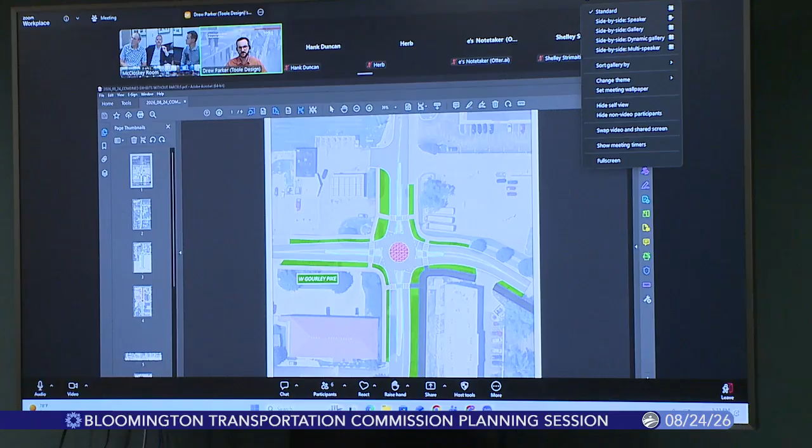Well, thanks for the introduction, Hank. So since we last met, we gave you a summary of what we heard during workshop week and some preliminary concepts, and we have been working on revising those concepts, like Hank mentioned.

By no means are these final concepts, but as part of this study, what we're trying to do is take the design objectives and the goal of the project, all the existing conditions that we collected, and address some of those known issues through these concepts.

So we've picked 10 locations throughout the corridor to develop these concepts, so it doesn't cover the entirety of the corridor. But as a reminder, what we talked about at the last commission meeting, our overall concept, wherever possible, is to narrow the street cross-section in order to widen sidewalks, add larger buffer spaces where we can add more landscaping and separation.

And where possible add shared use paths, especially north of the B-line crossing. So you'll see that shown throughout some of these different concepts here, starting with the first one. So this concept shows Gourley Pike, and what we're showing here is a compact roundabout.

We think this is a really good place to have a compact roundabout because it slows people coming off the bypass and heading towards the bypass. We know that in this northern section, the speeds get a little bit higher. Anything we can do to calm traffic as it comes on and off the bypass helps with increased yield and compliance at crosswalks, and just improves safety outcomes at intersections, because everybody has to travel through the intersection at slower speeds, 15 to 20 miles an hour instead of, today, where they don't have to stop at all at this intersection, maybe more like 40 miles an hour or higher in some cases.

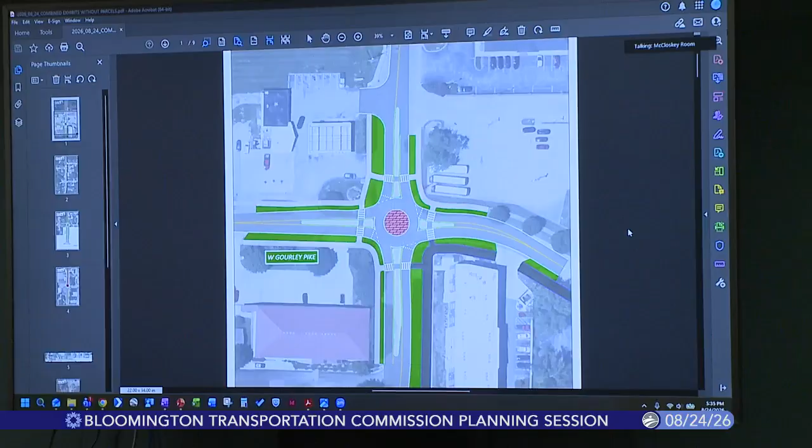I've heard that in recent times, INDOT has been out to review the 17th and the bypass intersection and found it to be problematic. And they have also plans in the near future, next few years, to do something with that bridge. Have those conversations been factored into what we might be doing here, because that's very close to the bypass?

Yes. So regarding the bridge, we currently have a bridge about a half mile west of here that connects Gourley Pike to the Arlington Heights Elementary School area. INDOT owns and maintains that bridge, and they are doing some maintenance, tearing it down and building a new bridge near there. Originally, our hope as the city was to push it closer to Kinser Pike to allow more direct travel for those going to either the high school or to Kroger in that strip mall area. INDOT pushed back on that, so the location of the bridge is shifting a handful of feet, but it's not going to be anything meaningful to really make a difference in this study.

For that reason, this is a bit beyond the scope of this specific concept, but this past spring, the city applied for the federal Safe Streets for All grant program, and some of the areas we applied for are along this corridor. One of the items we applied for, which we'll hear back about later this year, probably December, is an intersection redesign at Kinser and Gourley, and a shared use path to go east on Gourley down to Old 37, cut under the bypass, and come back up north of the bypass. So there is a grade separated crossing at the bypass. Again, that is very dependent on federal funding, but that's an idea we've had because we know INDOT is not budging on that bridge location very much.

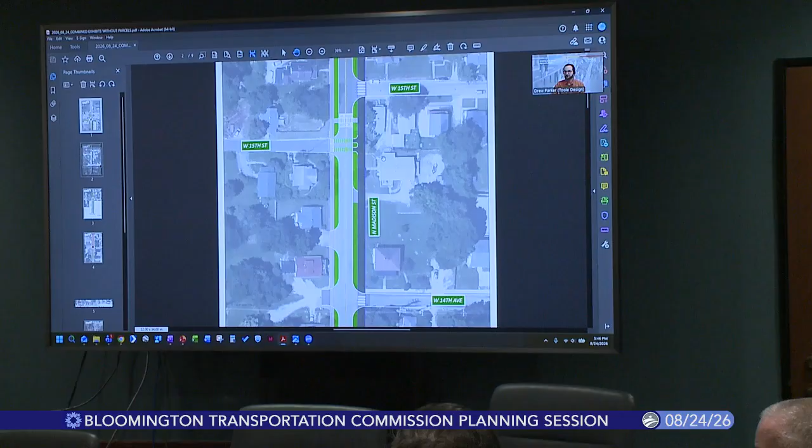Other questions? There are other neighborhood greenways in the city, right? Yeah, that you could reference as examples potentially, like Allen, or I don't know if you have others off the top of your head.

Anybody else? I'm wondering about bicyclists heading westbound on 15th Street, on the multi-use path. They're crossing, I'm having trouble imagining it. If I'm biking on the east side of West 15th Street and I get to Madison Street, if I don't know the thing is there, I might try to turn onto Madison. If I know it's there, I turn onto the side path and jog down. There's a raised crosswalk to my right, but how slow will traffic be slowed down so that I feel safe crossing?

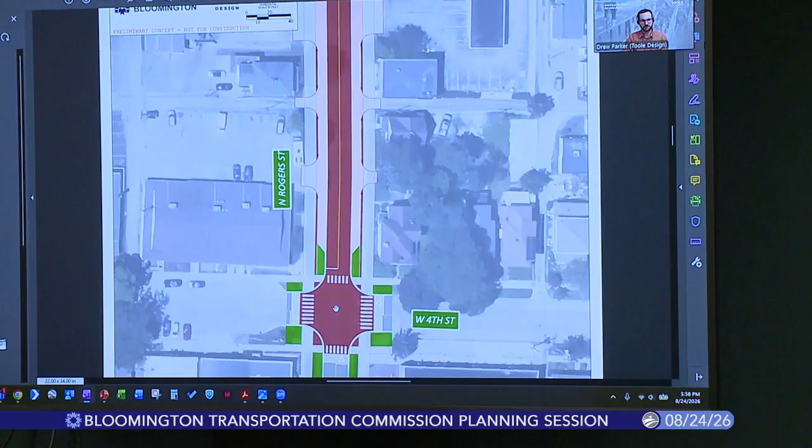This could potentially go up to Kirkwood, or even further up to 6th Street, but we were just showing this section as a representative intersection. The street could potentially be done in pavers or bricks to really create a traffic calming feel and a sense of place, but it could also be done in colored concrete or other materials. The idea is that it feels like a more special place than some other portions of the corridor, with a higher design treatment. That's the concept here.

So that brick red color, that's the roadway. These lighter pink outside sections would be on-street parking lanes. And then you have very wide sidewalks in this stretch to support that more downtown feel.

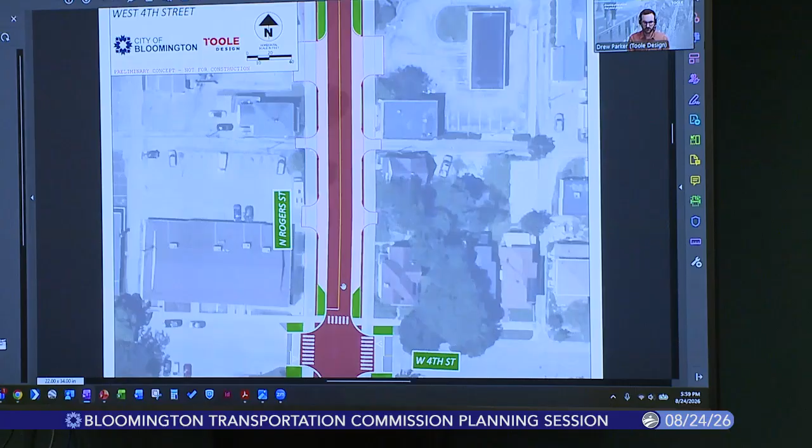Questions on 4th Street, commissioners? Maybe just a clarification. I know we discussed in the past the different treatment, the brick or any other material, but is it just the aesthetics, or is there any function towards that as well with this change?

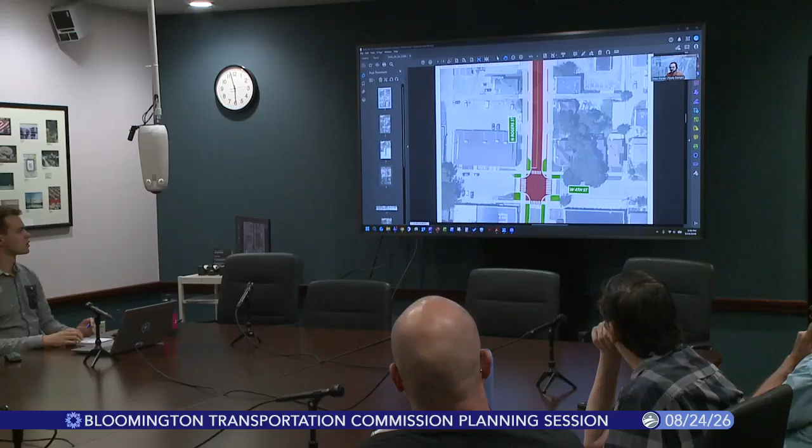Brick and pavers also have a traffic calming effect for people driving. There's both a visual and auditory change compared to asphalt or concrete. You'll see this in a lot of communities on downtown streets, maybe just on the public square or a few blocks around the most downtown area. They'll do it in brick or pavers because it really slows down traffic, especially when there's a lot of activity in that space. So it's not just visual, it also has a bit of a traffic calming effect.

Got a question, Mr. Cobb? So instead of brick pavers, does stamped concrete give you the same perspective? Brick's pretty expensive. Potentially. I'm not the right person to ask about that. I'm not an engineer, but I would speculate that stamped concrete maybe doesn't have the same strength for driving on as pavers and brick. But I would need to ask one of our engineers about that in more detail.

I'm gonna ask a question here of staff, I guess. Is cost one of our concerns? Do we not have an interest as a commission in spreading out improvements across the city? And if cost is a concern and there's no engineer here to answer our questions, are we supposed to make a final weigh-in tonight?

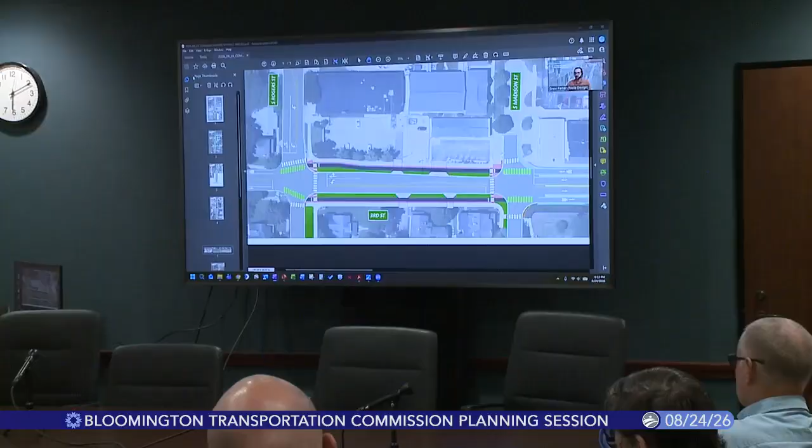Comments or questions, Mr. Binder? One concern or perhaps objection I have to this, which overall looks great by the way - one thing that bothers me a little is that the separated bike lanes on the section of 3rd Street between Rogers and Madison go under the B line, where the roadway currently is, if I understand correctly. They don't connect with the B line. Is that right?

So what we've shown in this southeast corner of the Madison Street intersection is extending this shared use path that does connect up to the B line. That's one place where there's a connection. But you're right, because this is an underpass going down under the B line, we're really just repurposing the motor vehicle travel lane, so the connection would be at this sidewalk level, where part of it exists but doesn't go all the way to Madison. This would propose extending that all the way to Madison.

I'd encourage the team to consider ways to make the connectivity between east-west bike lanes on 3rd Street and the B line more straightforward and less awkward, especially if you're coming south on the B line and want to turn west onto 3rd Street. It's a little awkward, and there's not really inherent value in having these cycle lanes go under the B line when, I understand for cost reasons, if you're reducing motor vehicle traffic lanes to one in each direction you have the roadway space to do that, but it doesn't improve connectivity to the B line itself. I understand the explanation about the side path on the south side of 3rd, but I'd hope there's some thought given to better ways to connect to the B line here, because I think that's a real opportunity.

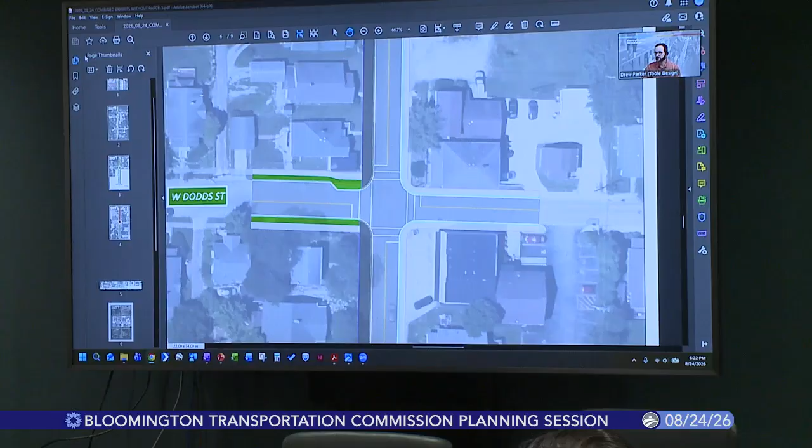So the shared use path is on the west side of Rogers in this area? There is a shared use path from Country Club to Patterson on the west side of Rogers, and this would essentially extend that path further north. Are you going to move the sidewalk, the path, out into the roadway? That sidewalk has retaining walls on there. Yeah, so this holds the back of sidewalk on both sides of the cross section, and it would widen the sidewalk into the street.

Because in some places currently there is an on-street parking lane here, so the pavement is a little bit wider than this currently. As we saw in our parking utilization counts, the amount of people parking in that space is very little or zero on most blocks in all the periods that we checked. So we're repurposing that space to widen the sidewalk. This doesn't change the back of sidewalk in this section.

And that goes all the way to 3rd Street on that side? For this section, no. Our proposal was to extend it up to, I believe, 1st Street, where the existing bike lanes start in the Hopewell area. Oh, and then it's going to cross the street and go through Hopewell? Between 1st and 2nd, you have the new existing protected bike lanes, and then north of 2nd, we were not proposing any shared use path or any additional bicycle infrastructure. North of 2nd Street, there's no infrastructure, bike lanes north of there? Correct.

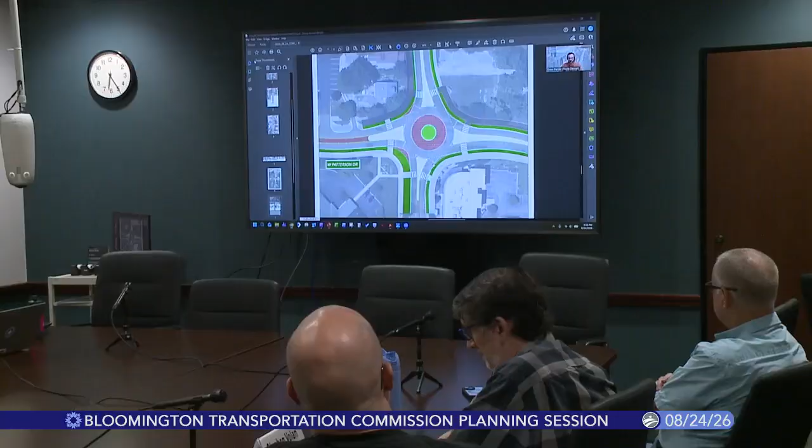So the next concept that we have is at Patterson Drive, and this is a place where we have a little bit more right of way. So we're showing a single lane roundabout in this section as a potential concept. This does potentially require, similar to Gourley Pike, a little bit of easements for shared use paths and sidewalks on the edge of the roadway. But there's a little bit more right of way, and a little bit more traffic volume, side street traffic volume with Patterson. And so the nice thing about a single lane roundabout here is that it calms traffic both east-west for Patterson as well as Rogers, keeping those speeds lower to keep everybody safer at the intersection.

So we also have, coming from the east, a shared use path along Patterson that connects into here as well. That's also why we have the extension of the shared use path on the west side in this section, making that connection east-west to Patterson, but also to the south on Rogers where it continues.

So for the single lane roundabout, you can see here the larger circle showing the red brick crosshatch, that would be mountable for large trucks, but the green center circle could have landscaping in it or a gateway treatment, public art, that kind of thing, because it doesn't need to be traversable or mountable by large vehicles. So this is both a safety and traffic operations improvement, potentially over the existing signalized intersection.

Questions on Patterson? Mr. Binder: I'm curious what your methodology was in determining the size of this roundabout, the diameter of it.

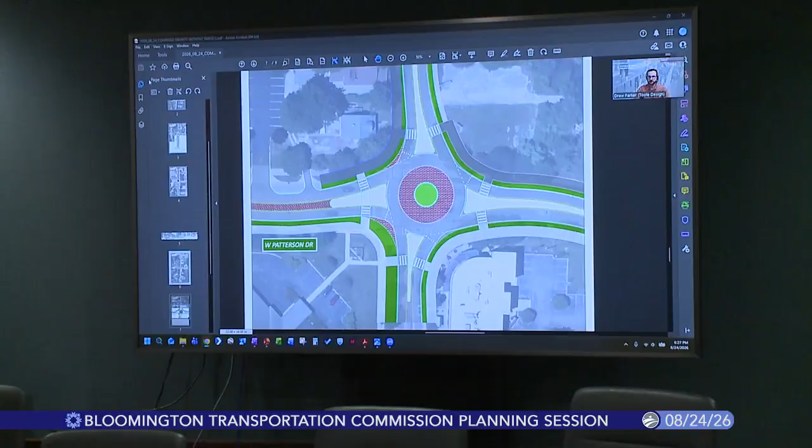So this uses a standard inscribed circle diameter for a single lane roundabout using design best practices. There's some flexibility, and I think we went as small as you possibly can. Whereas at Gourley Pike, that's a compact roundabout, and the reason for that is because there's not as much space, so you need to use a compact roundabout and make the circle smaller, but then the full circle needs to be mountable. So this is essentially as small as you can get with a single lane roundabout. Some of the benefits of a single lane roundabout are a little bit more deflection and slowing of vehicles as they approach, larger median refuge islands, a little bit more capacity than a compact roundabout, and accommodating truck turns without them having to traverse and drive over the center island.

Okay, otherwise they operate similarly. I guess I don't totally understand why there's a hard delineation between what is considered a mini roundabout versus a single lane roundabout. In my mind there's just a continuum of compact roundabouts on the smaller side and single lane roundabouts on the larger side. But you're suggesting there's actually a distinct set of categories for sizes of roundabouts, at least in engineering best practices.

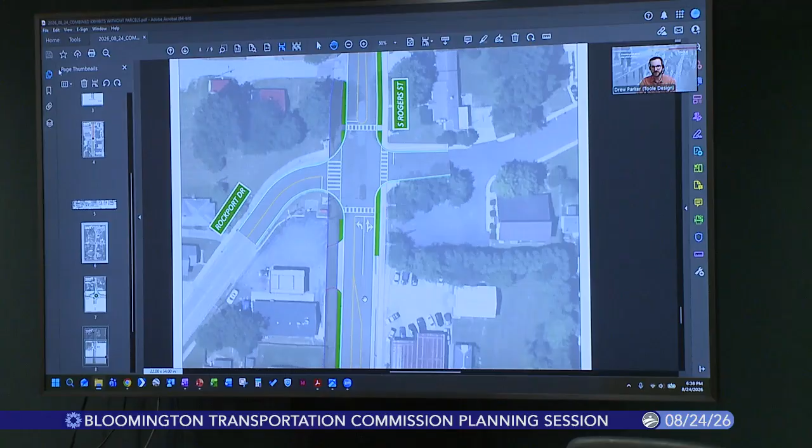So what we're showing here is adding a northbound dedicated left turn lane. Today there is a northbound through lane and actually a dedicated right turn lane into the street to the east, which is really not needed. The traffic volume is very low for that dedicated right turn lane.

So we're adding this dedicated left turn lane, converting that outside lane to a through right turn lane, and that allows us to have a striped median on the north side here and just better organize the intersection and get left turning vehicles out of through traffic so that they don't back up the through traffic and create a safety issue. What we're also showing here is adding another crosswalk on the north leg of the intersection. There's no crosswalk on this north leg today, so this would add in a new crosswalk there.

Other than that, it is very similar to the existing cross-section, but we make a couple of minor tweaks to make things more compact and better organize traffic through the intersection. Questions about Rockport Road?

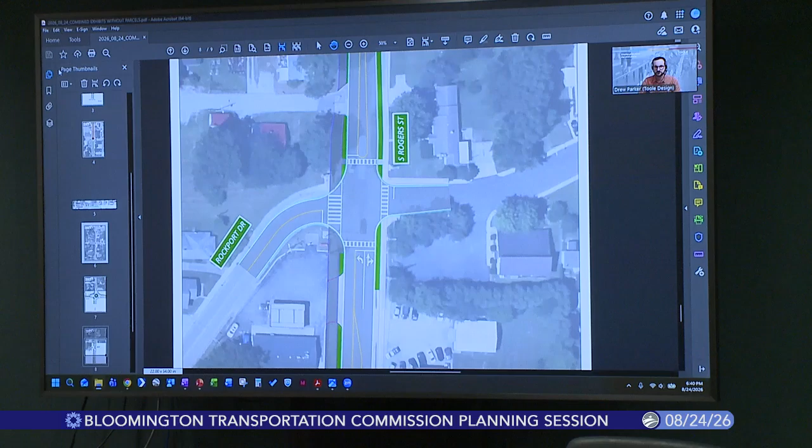I don't love the right turn angle from Rogers to Rockport. I feel like if we're trying to be safety minded here, we should be trying to aim for closer to a kind of 90-degree approach. I think there's definitely some potential here for, at such a shallow angle, a conflict between right turning traffic from Rogers and the multi-use path.

And then the other thing I would say is, it doesn't seem like there's any reason to not have a poured concrete island on Rogers for the crosswalk on the north side of the intersection here versus just a painted one. But yeah, I don't know. This intersection's been a problem for a long time, and I don't live in this area, but I have plenty of friends who do, and I don't think anybody really likes this intersection.

So I hope that if we are gonna try to improve it, we can do as much as possible. Further comments or questions on Rockport? Mr. Midas, I take it you'll speak up when you have a question, right? Yes, I will. Okay, I'm good now.

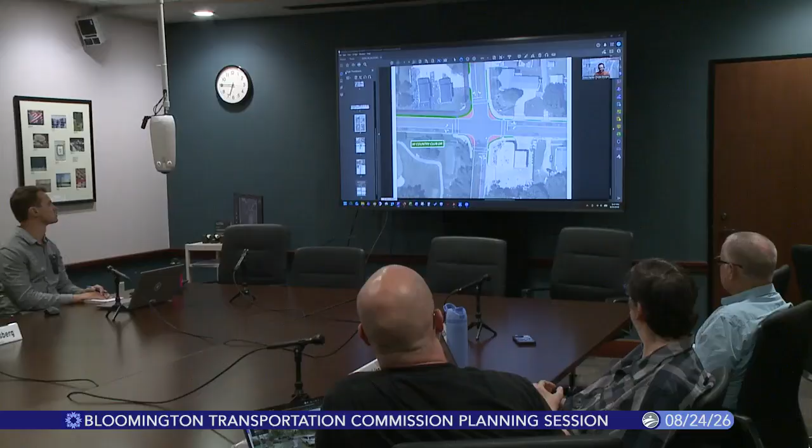Any other questions? Let's move south to the next intersection. The last concept I have to show you today is at Country Club Drive. Like some of the others we talked about, we also tried test fitting a compact roundabout here. But because Country Club, similar to Patterson, is a truck route - we have to design it for large trucks to move through - we need a larger circle for the roundabout, and we weren't able to fit that. We tried and tweaked it, went back and forth a number of times in review, and it just took up too much space and required too much additional right-of-way acquisition to really be feasible.

So the other concept we came up with is to add truck aprons at all the corners and make this intersection a lot more compact. Like Hank mentioned, I think one already exists - I can't remember where you said, in Patterson. So like it already exists in the city, and we could look at that for Rockport. The idea is that trucks can still make these right turns, but passenger vehicles would be slowed down significantly with those truck aprons, because you need to track around them. So that's the overall concept - just make it a more compact and slower intersection, and more comfortable to cross as a person walking or biking.

Questions on Country Club from commissioners?

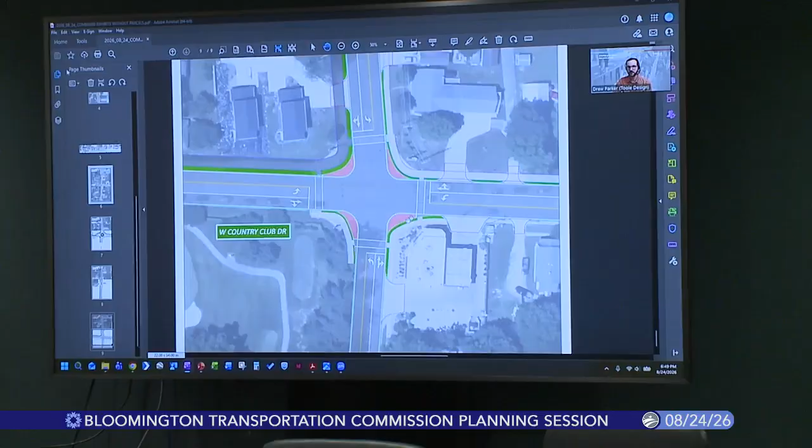We discussed crosswalks just now? There is a downside, yeah, for the crosswalks. The previous example, they were more visible, and now it's like... Yeah, so this just came up last week.

There's some research that shows for right turning vehicles, there's a sweet spot of having about 16 feet or less from the curb return to the crosswalk, for motor vehicle drivers to not already be speeding up. So if you're within that window of 16 feet or less, drivers are still making their turn and not yet speeding up. If you're a little further back, then they're accelerating through the crosswalk, which you really don't want.

I think that's kind of what happens when you set back the crosswalks too far, that right turning speed can just get higher, and we want as low a speed as possible at the crosswalk. So when they're closer to the intersection, with a small curve radius, that's the slowest speed we can achieve.

Did that answer your question? Yep, thanks. So one car length roughly? Yeah, we usually use 20 feet as a rule of thumb for car length, but 16 depends on what type of car you're talking about. What kind of boat are you driving?

All right, further questions on Country Club?